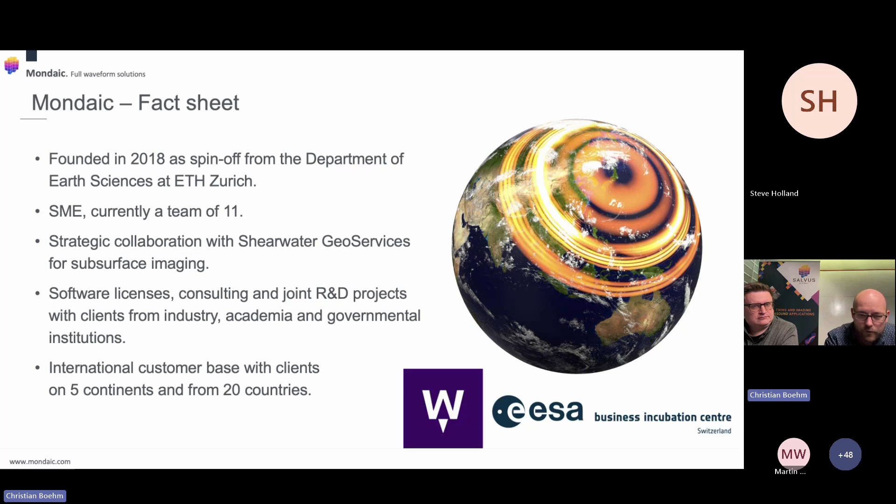Our clients range from industry, academia to governmental institutions. When you do software, it's actually fairly simple to go international. So although we're pretty small, we do have a fairly international user base. We're really proud to see our software being used all around the globe in millions of simulations. And there's also a very strong tie to R&D projects. So we do see quite a huge output of scientific publications of the use of our software.

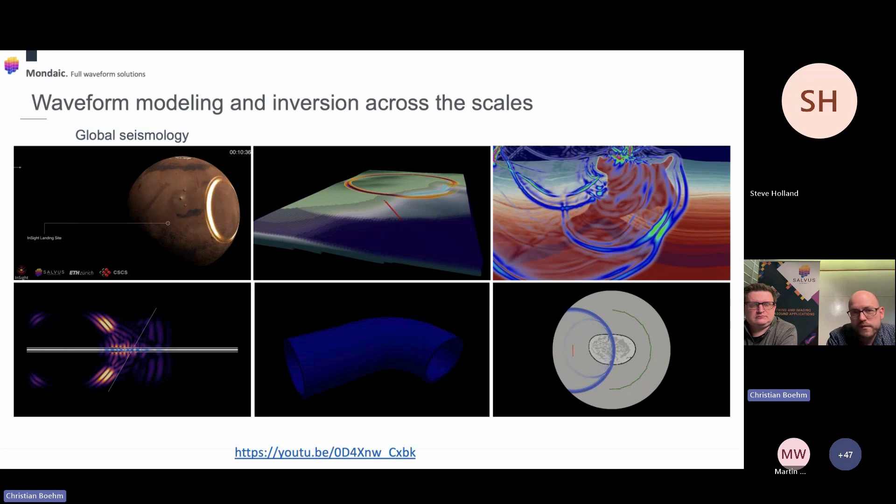So what is it that we do? Well, just a quick gap in scales. Where we originally come from is what you can see here on the top row. And those are waves that are very different from ultrasonic waves. Those are seismic waves. So we have been working together with NASA in the context of their InSight mission to simulate Mars quakes, to then infer information about the interior structure of Mars.

We have done quite a lot of work on simulating earthquakes and seismic hazard. We do have waves that still propagate over hundreds of kilometers. They can be measured on land or in subsea with distributed acoustic sensing. And for subsurface imaging, this is probably the pillar that promoted this method the most over the last couple of decades.

Many of the HOIS members, I think, are from the energy sector, and many of these companies have really driven the developments of waveform simulations and waveform inversions as a very powerful method to analyze the subsurface. This is primarily for resource exploration, but nowadays also shifted towards carbon sequestration, geothermal energy, and site characterization for wind farms. So here we see waves propagating over really long distances. And the question might be, what does it have to do with ultrasound and NDE?

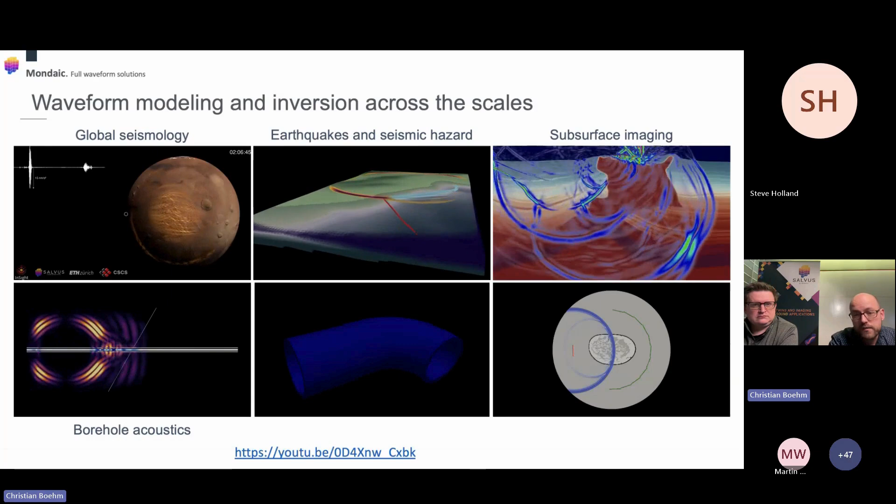Well, the same physical principles, they can be transferred to much smaller scales. And this is now what we see at the bottom. Borehole acoustics, where we are much higher in frequencies and much shorter distances, but we see the same physical phenomena occurring. We have waves interacting with the material properties and the geometries of the objects. We have NDT inspections on potentially curved surfaces, like for pipelines.

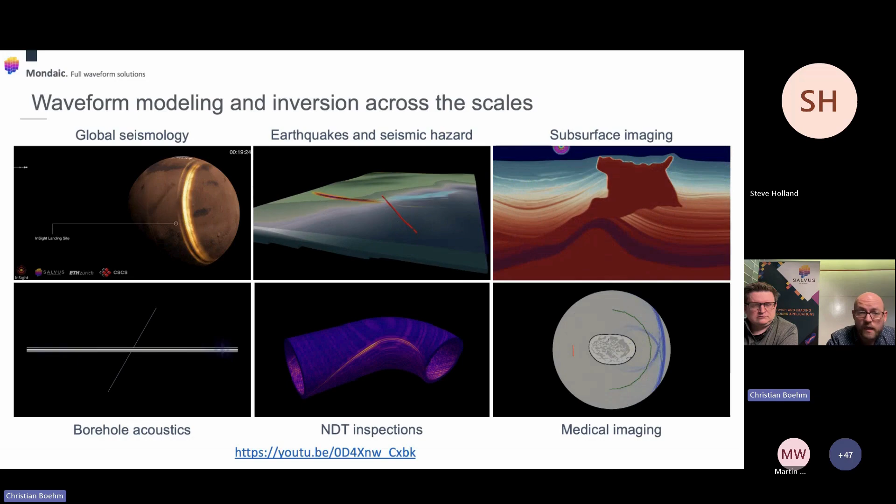And if we scale down the propagation distances even smaller, we end up with medical ultrasound, where we see that nowadays scanning devices for ultrasonic breast cancer imaging have reached the precision of MRI. So there's really a lot that we can infer from ultrasonic measurements. And the same physical principles literally apply from tens of thousands of kilometers if we study waves on Mars, all the way down to the millimeter scale that might be relevant for medical imaging.

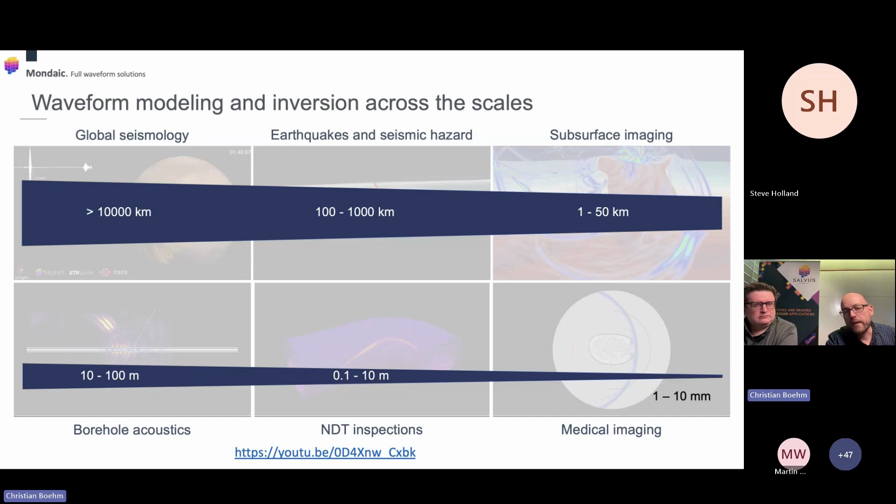So what we're trying to do is we're trying to promote this method for ultrasonic NDE applications. I want to give you a little bit of background about our technology, and then finish up with a couple of case studies, and hopefully engage in a discussion of how this could be useful for the projects that you're working on. So I guess I don't need to tell you, ultrasound is a great modality to non-destructively analyze specimens.

It's widely used. It's quite successful. You have conventional inspection techniques based on A-scans, B-scans, or C-scans. We've heard a lot about this already in the previous talk. And this works great in many applications.

However, we think that we don't really use the full potential of ultrasonic imaging yet. And this is when it comes to quite challenging testing environments, where the fact that all these scanning techniques only use partial data reaches its limit. It then leads to potentially low sensitivity and requires a lot of manual interpretation.

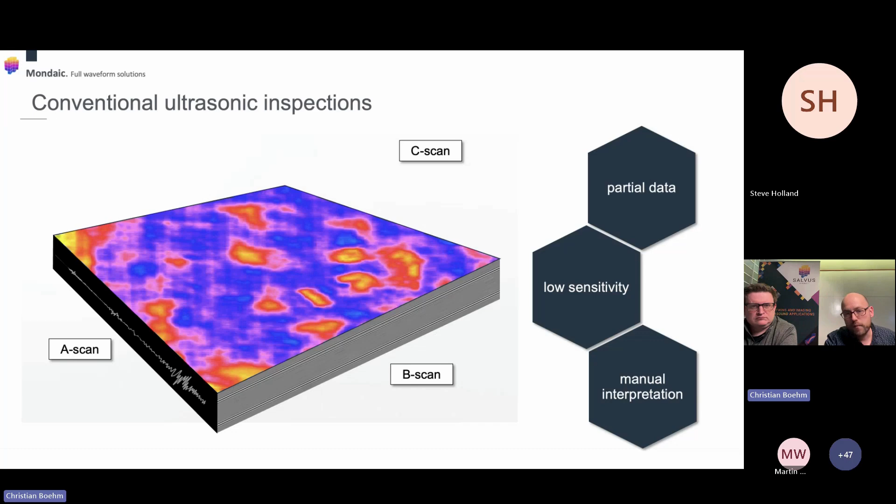And this is particularly the case when we have complex materials, for instance, exhibiting quite a strong anisotropy, or if we need to deal with quite complicated geometries, which are hard to represent in ray-based approximation of ultrasound. So what we're trying to do is transfer a technology that has been developed primarily in the geophysical sector of analyzing waves and inferring information about unknown objects from these waves. And this is what we call WSCAN, the waveform scan.

It's a quantitative imaging method that tries to infer three-dimensional models of the interior of an object through ultrasound tomography. And at its core, we do have a physics-informed digital twin, which really encapsulates all the waveform physics that are at play when we do an inspection.

So here we have a simple example of a CFRP plate. And as you can see from a single piezo element, the wave field that is emitted becomes quite complex very quickly. We have a strong anisotropy that we see. We have interaction with a delamination that leads to multiple reverberations. We have backscattered waves. We have guided waves. So there's a lot of complexity at play that's typically not captured if we approximate the ultrasonic wave just by a simple ray. By bringing in more accurate physics, we're then able to reconstruct high-resolution images, even though we're using low frequencies, and we can really turn ultrasonic inspection data into automated reports.

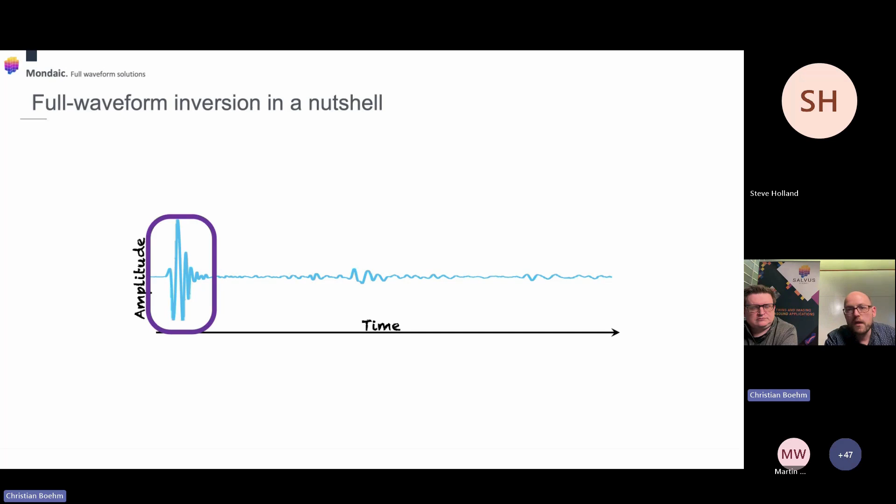How does this work? Well, in a nutshell, full waveform inversion tries to exploit a lot more data than conventional ultrasound. If we see a simple A-scan depicted here, you all know that a time of flight inversion method would essentially time gate the first arrival. We would get a travel time, and from that we could essentially do a simple approximation. The time of flight is equal to distance divided by sound speed. So if we wanted to infer the material properties, we could easily solve for sound speed in this case.

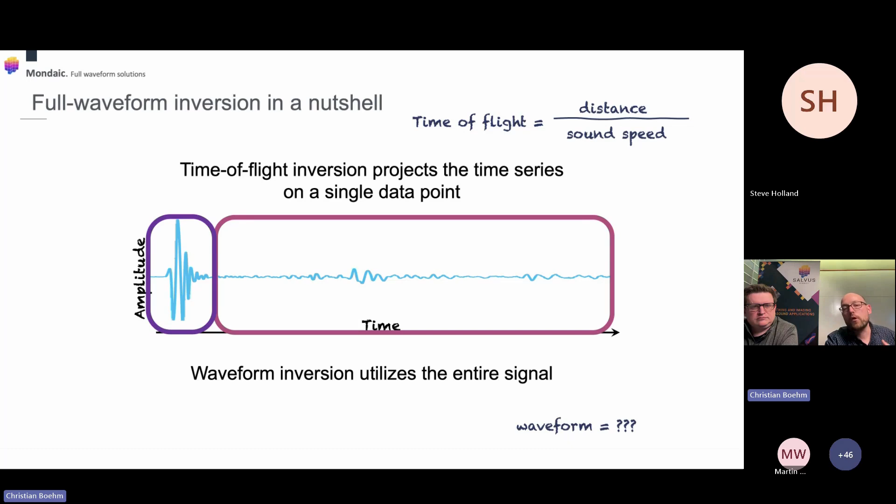But what you can also see from this little chart here is there's a lot of data that we'll just throw away by just looking at the time of flight. And this is what waveform inversion is trying to do. It really tries to utilize all the data available and invert and reconstruct a three-dimensional model of the interior using those data. The tricky part is, in this situation, we don't have this simple relation between time of flight or the measurement and the material properties. So we don't really know how we can relate those data to the interior structure. And this is why we have to solve a computationally more complex problem in order to get to this point.

But in a nutshell, what you can see on the right-hand side is why this method can be very powerful. We here have three different A-scans overlaid on each other. And as you can see, the direct arrival doesn't really show any difference. There are only tiny differences maybe in the amplitude. But for the later arrivals, you do see indeed quite some differences. And those are data taken from a block of concrete where we have a healthy structure, once a structure with an air void in it, and once a structure with some water inclusions in the duct.

And you can see that if we really analyze the long observations that we have here, differences appear, and we are trying to use that information to then reconstruct the interior structure with waveform inversion. So really trying to reverse engineer those signals, get a match to the actual data. By doing this iteratively, we then reconstruct a 3D model of the elastic properties.

A great part of this is that all the invention and innovation really only happens on the data processing side. So we don't require any different hardware, or we do not need to acquire data in a different way. We can work with off-the-shelf conventional probes, so we can use phased array, guided waves, acoustic emission, impact echo. That really doesn't matter that much. The only important point is we're really looking for applications where current ultrasound may not give you the quality or the results that you're expecting to get.

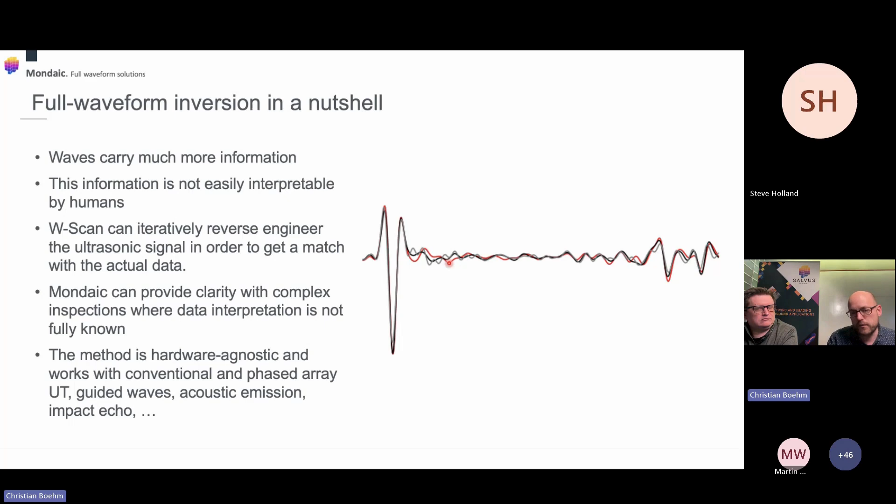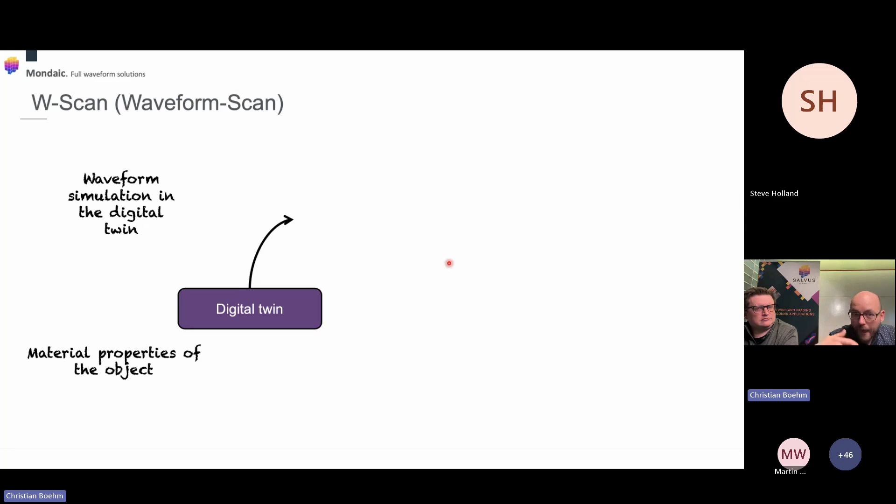To zoom in a little bit more, this is now a bit of a more technical slide of how the method works in principle. We always start from a digital twin. And digital twin obviously is a widely used buzzword. In our terminology, digital twin really means a model of the interior structure that we use to digitally represent ultrasonic wave propagation in this twin. So if we have this, we can start with a simulation. We can simulate the ultrasonic wave field as it would be emitted in an experiment, which gives us simulated data, which we can then compare to the measurements.

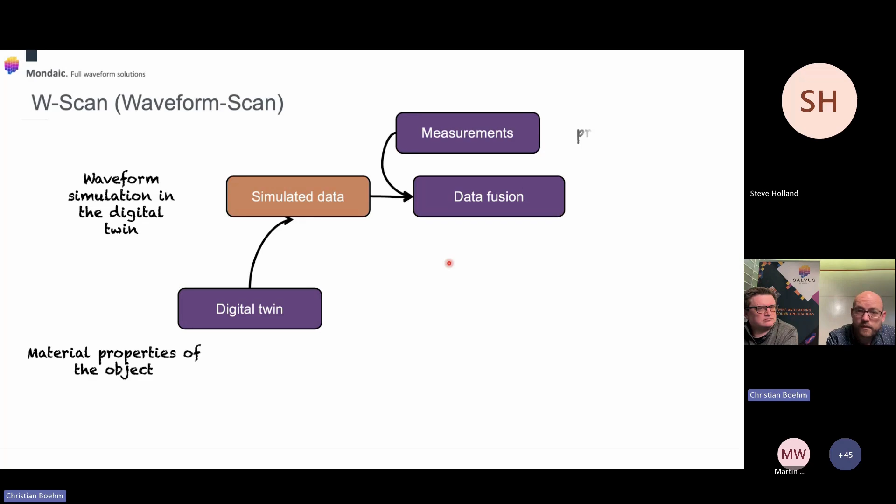And most of the time, we won't know the material properties of our object very well. This is the whole point of doing the inspection in the first place. So by comparing then simulated to measured data, we'll perform data fusion, and we will get a discrepancy between both.

And this discrepancy is where the method can then extract sensitivities that will tell us how I would need to modify my digital twin in order to have a better match between the measurement and the simulated data. And by doing so in an iterative scheme, I can then improve my digital twin.

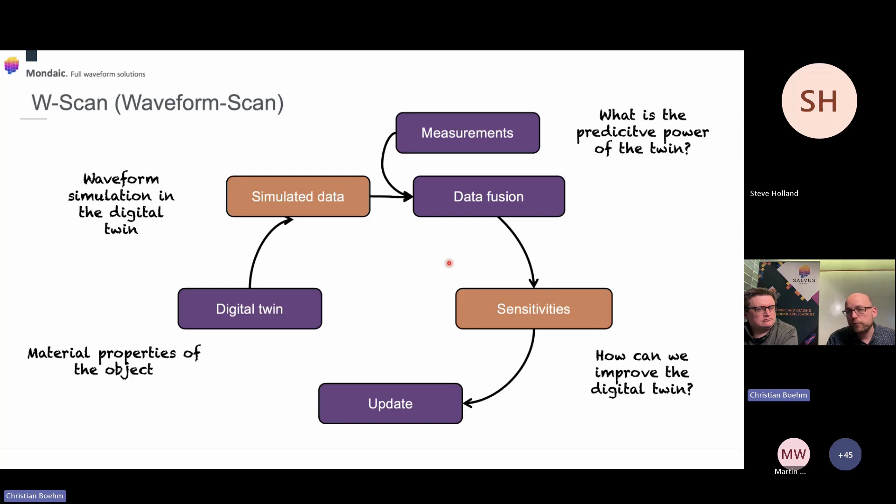I can keep iterating and refining my digital twin to eventually match the data that I have observed with my simulations. And by doing so, then creating an accurate representation of the interior properties of my specimen. So at the heart of it is really a digital twin, and we call it a physics-informed digital twin to distinguish it also a bit from a pure simulation tool.

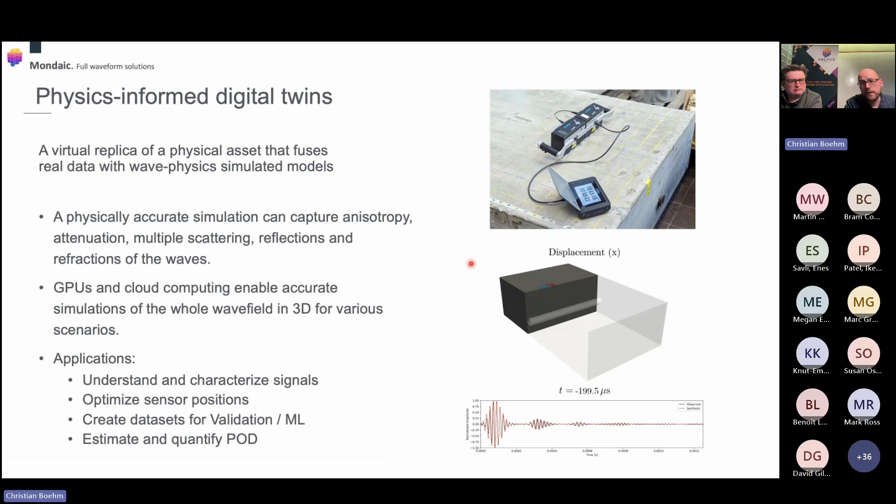So we really want to perform data fusion, comparing simulated data to the measurements that we can take out of the field. And these physically accurate simulations can capture all the complexities that we've seen in the previous animation that are at play when we perform ultrasonic measurements on a complicated structure. This can include anisotropy, attenuation, multiple scattering, reflections.

So it's a really complicated wave field, as the ones that you've seen in the animations previously, that occurs after a short amount of time. And if we can capture this in the simulation, we might also then use all the data available for the image reconstruction techniques.

Now you might say this all sounds great, but we tried this before, and this is extremely costly. And this is really where cloud computing, GPUs, and tailored methods to simulating waveform propagation come into play. What we develop is not a multi-physics tool that can simulate all kinds of different physics. We solely focus on the wave equation, but we can solve that very, very efficiently and orders of magnitude faster than conventional multi-physics tools. How is this helpful?

Well, you can see a small example on the right-hand side of a block of concrete, where you can see at the very bottom now an animation going where the black line is a measurement that we took on this block, and the red line is the simulation that we do after calibration. And we can really see that the observed data and the simulated data match literally wiggle by wiggle over a very long measurement time.

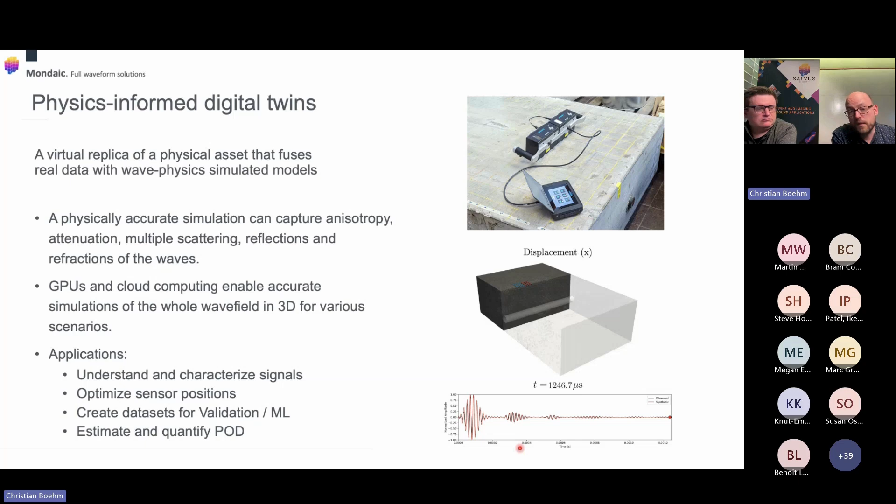If we can reproduce an ultrasonic measurement that accurately in a digital twin, it really helps us to understand and characterize the signals. We can use that to optimize sensor positions. We can also create lots of synthetic scenarios that can help with validation of machine learning algorithms without the need of manufacturing a lot of specimens manually and doing measurements on these specimens. And then finally, we can also use it to estimate and quantify the probability of detection for any given application.

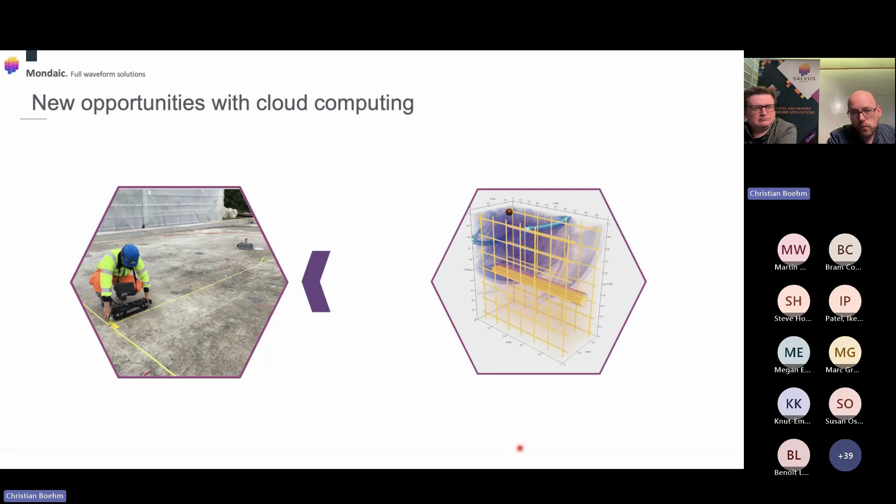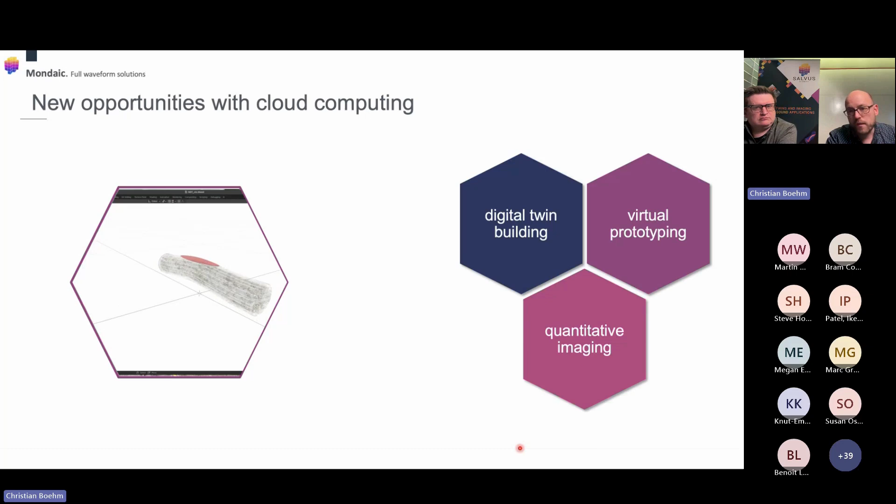So in a nutshell, what we do is we utilize cloud computing by sending data to the cloud and process it in the cloud in order to get reasonable time to solutions. And then we send back the data and the results to whoever is taking the measurements and allow them to analyze the results on site or later on in post-processing. This enables digital twin building, virtual prototyping, quantitative imaging, and monitoring. So really a lot of applications that we're seeing coming up on the horizon where this can be useful.

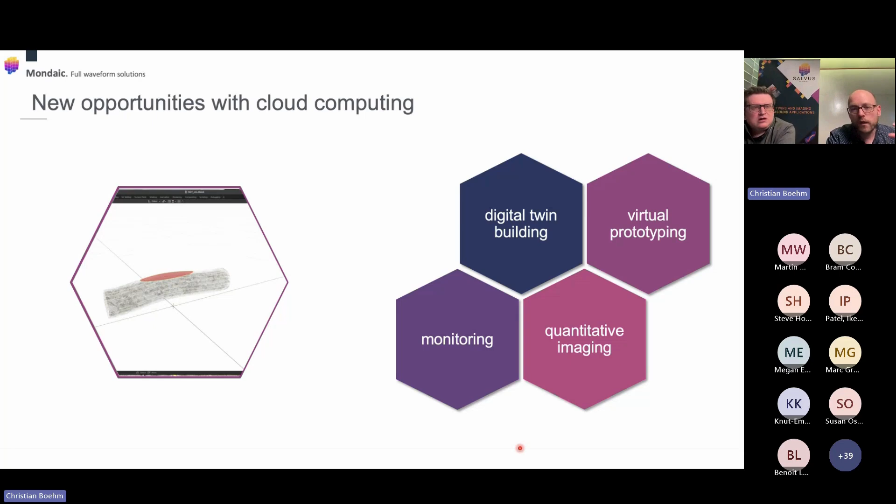And again, ultrasound is widely used and is very powerful. If you have an application where ultrasound is already working well, we won't be able to do any better. So we're really focusing on inspection challenges where currently ultrasound struggles to give good results. So for instance, if the received signal is not well understood because we have a complex interaction with the material's interior structure, or the interpretation is very difficult, leading to many false calls. So here additional physics might help to better understand what I'm seeing in my images.

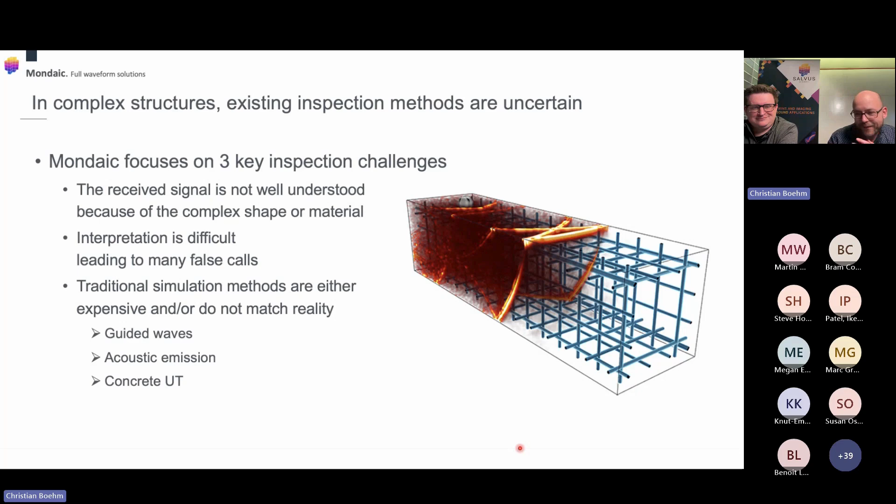Or when traditional simulation methods are either very expensive to carry out, or they just don't match reality because they simplify the physics that are at play. Three examples that Chris will go into more detail on in some case studies are, for instance, guided waves, acoustic emission, or ultrasonic inspections of concrete. So I really see a lot of potential in this method, and to convince you that this is not just a pipe dream, but something that also works on real data, I'll hand over to Chris to walk you through some case studies.

Thanks, Christian. Yes, the first case study I'll go through is a guided wave in a composite panel with stringers. This is really to show you the process, and it's applicable to other types of materials, other types of ultrasound as well. The process is fairly similar between all of them. Composite panels were important as well, especially things like fiber waviness or delaminations out of plane, and that's why we've come quite far on this project, and this is a good one to show as well.

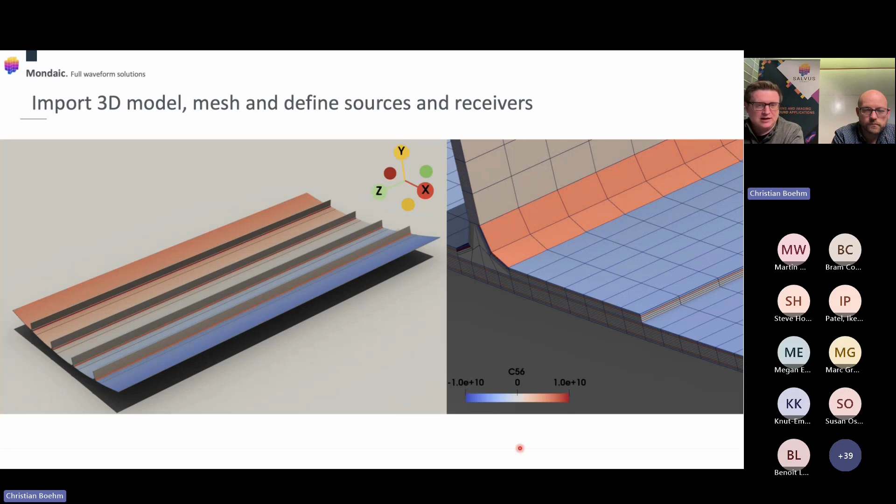The next question I'm usually asked is, well, Chris, I've got a CAD model, but actually that doesn't represent what's actually in real life, and that's quite correct. There are tolerances, especially with service inspections as well, where you've just got a simple drawing and the asset's over 50 years old. Yes, that will be difficult to get a match first time, but that's where our procedures help. We have shape optimizations throughout the inversions.

But it's good to have a close CAD to start off with, and you'll see the examples of what we do here as well. But yes, you don't need a fully accurate CAD to start off with, and then our software will correct the CAD, so then you have a better CAD model for the future as well, using the ultrasound that you're getting.

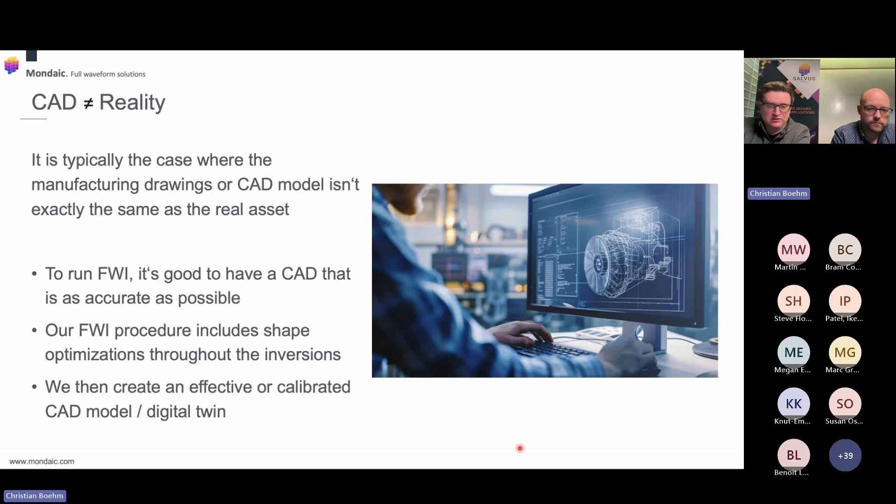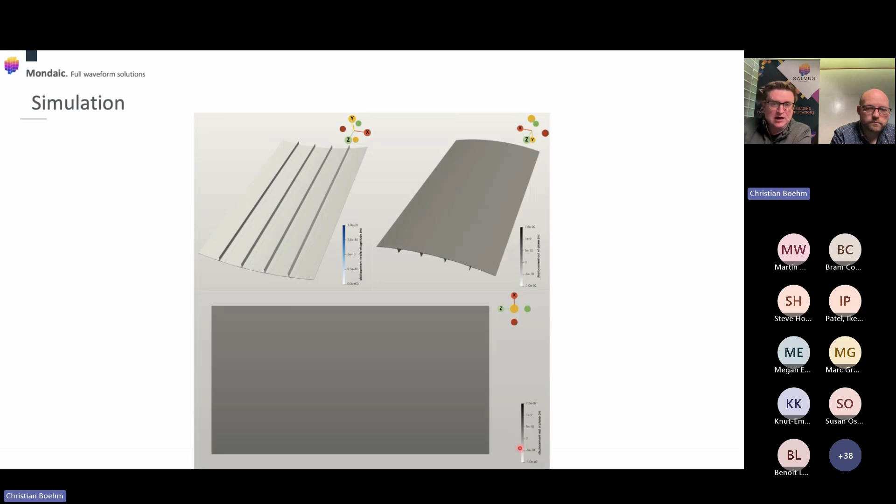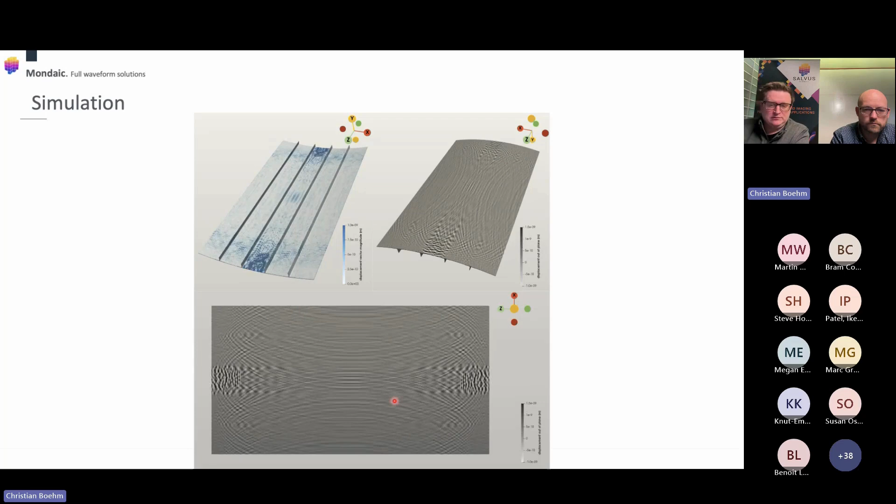So then we run a simulation, much like we know the equipment. What we're modeling here is a guided wave from a single piezo element propagating in this panel there. So you can see the anisotropy because it's not a full sphere, and you can also see some waves traveling down the stringer as well. Very light, but it's all there. So that's how the ultrasound travels through the panel in a simulated case. We'd then like to calibrate that.

So what we have here is the simulated data on the left, and then we have access to a laser Doppler vibrometer to image the vibrations from that as well. This is actually the data from the LDV scan there. Again, you don't need exactly this equipment. This really shows the vibrations across the whole panel, so it's quite nice to show you what we can do.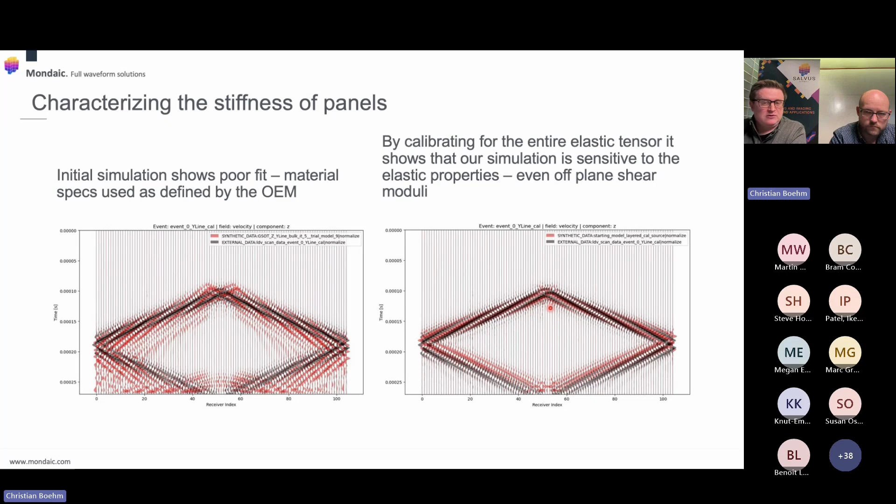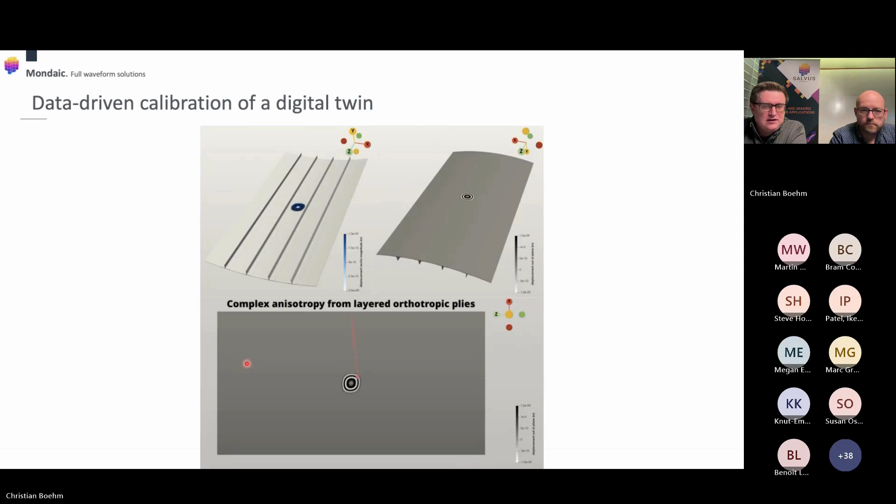But by calibrating now the entire elastic tensor, we can optimize the fit, and you can see now, at least at the first phase, we've got a very good match, even for out-of-plane shear moduli as well. So it shows that our simulation is sensitive to the elastic properties. So now we put that back in the model, and you then see, again, the optimized simulation based on the real data.

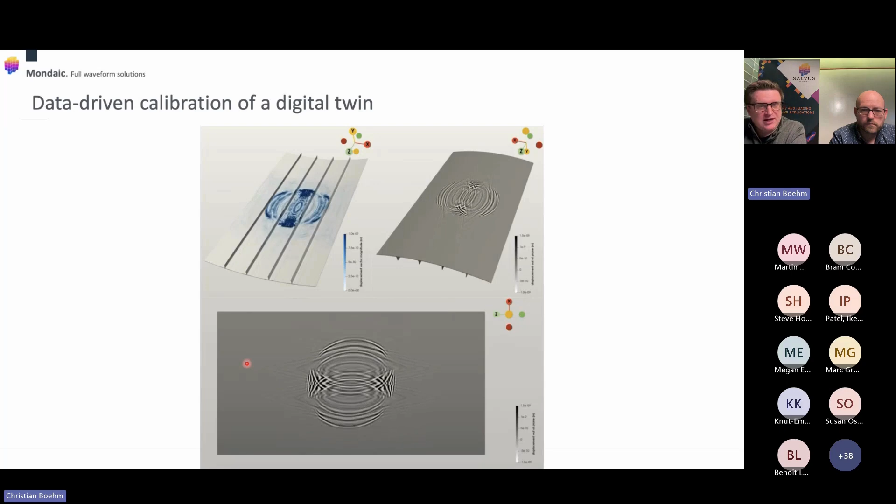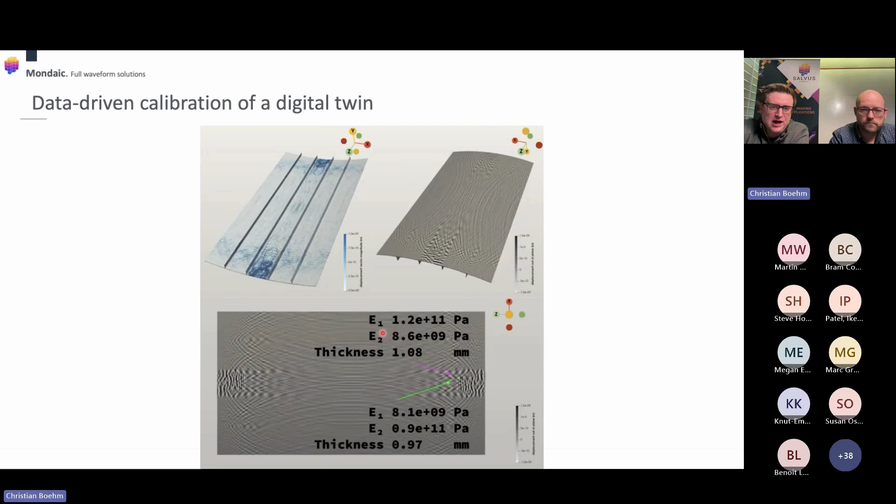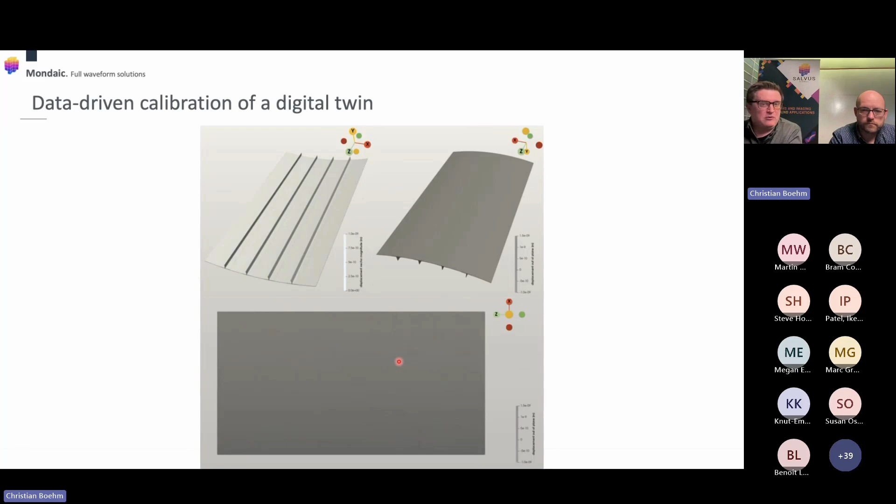We've got some Teflon samples in this piece as well, and this is before we put it in, but it also shows defects very clearly. But what you can do is, because you've got that whole panel there, you can actually take any point on that and extract the Young's moduli and the thickness and other material properties as well. So it's not just a C-scan you're getting, it's full material properties that you can extract from that single piezo transducer.

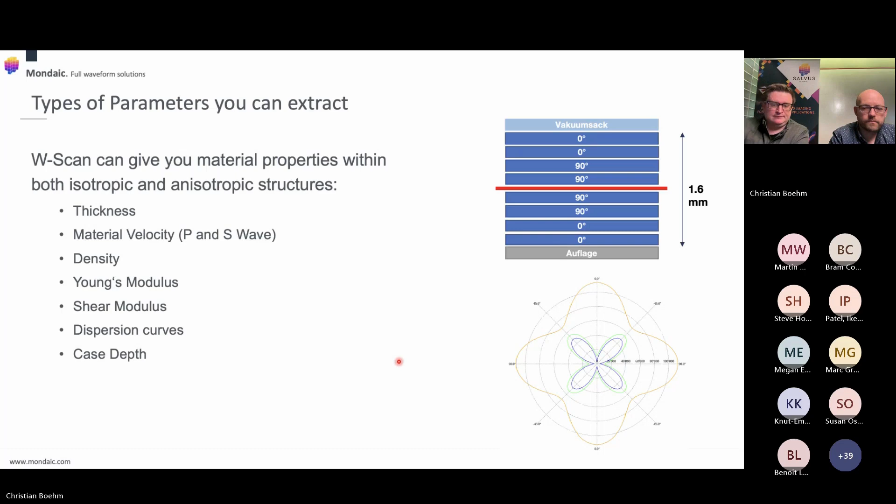So these are the types of parameters you can extract. Things like thickness, which is normal. You also can get out the material velocity, the P and the S wave, the density of the material, Young's modulus and shear modulus. If you're using guided waves, you can also calculate the dispersion curves, and even material properties like the case depth, because that would be a different velocity.

So that was more of a production-based application. We also have in-service inspection experience to show the practicality on aging assets. This particular example is for concrete inspection, but again, it's applicable to other ones. This is where we didn't really know the asset we're inspecting in full. You can see here, it's a retaining wall with ribs.

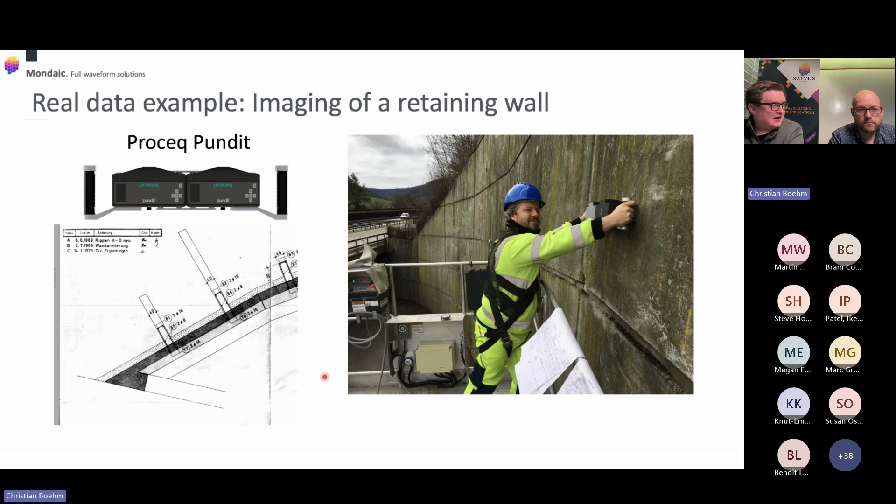What the client wanted to do was make a scan to find out where they could put additional anchor points in there. We didn't have a CAD model. We had this drawing, and I don't know how old it was, but that's all we had. We took that as the initial model and then began a simulation in this digital twin. This is using the Proceq Pundit low frequency ultrasound tomography machine.

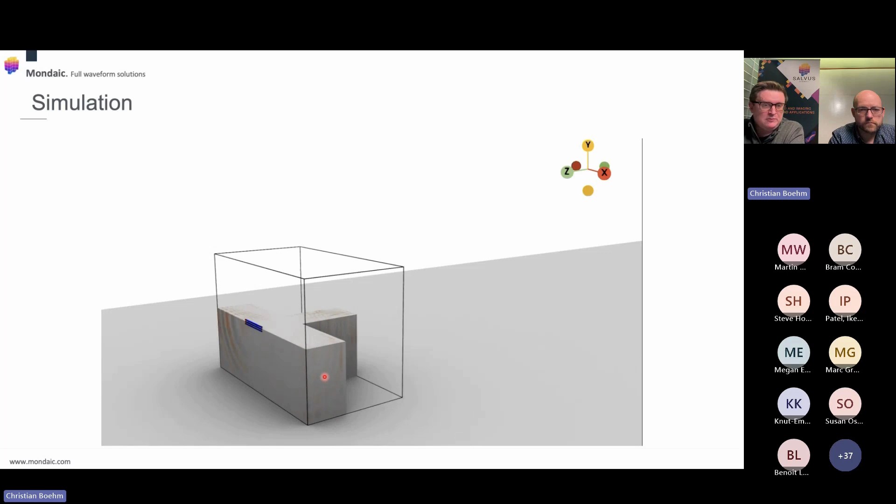You can see this is how the ultrasound flows into this retaining wall and then the back ribs there as well. What we wanted to avoid is of course drilling where there's rebar underneath, so any kind of density anomalies is important to find. So using this iterative data fit, it's not just one full wave inversion we run, it can be many, because the more iterations you run, the closer to reality you get.

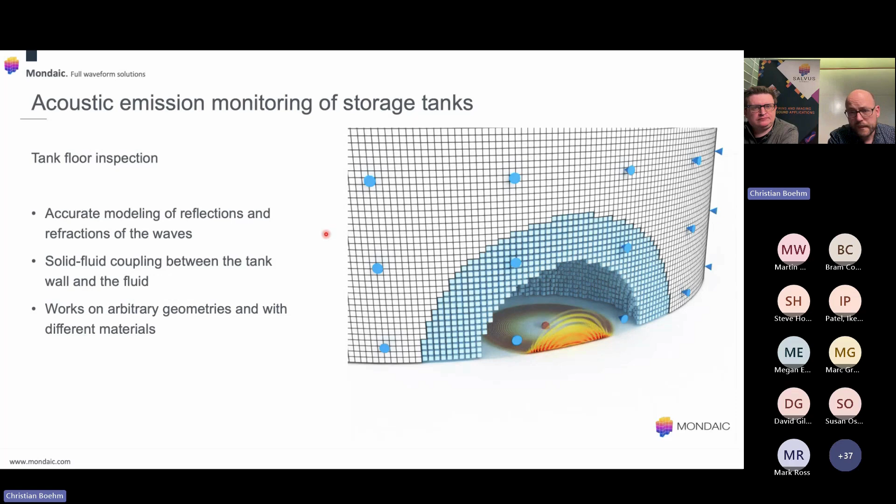And we have a geometry which can be more complex. In the simulation we only see a cylinder, but as you all know, the interior of such a tank can be quite complex, and the waves will interact with those geometries as well. Acoustic emission in itself is also a modality that is quite widely used for monitoring of concrete structures.

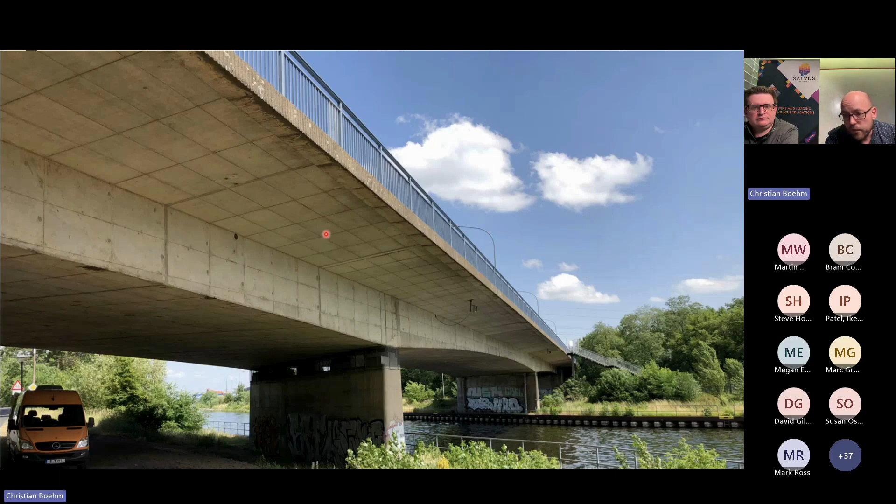This is a project we're currently running on a bridge in Germany, where the idea is that acoustic emission can monitor tension wire breaks. If too many of these steel cables break, the bridge will eventually collapse. We want to prevent that. How can a simulation help in this case? Well, again, the digital twin can help with planning of such a monitoring system.

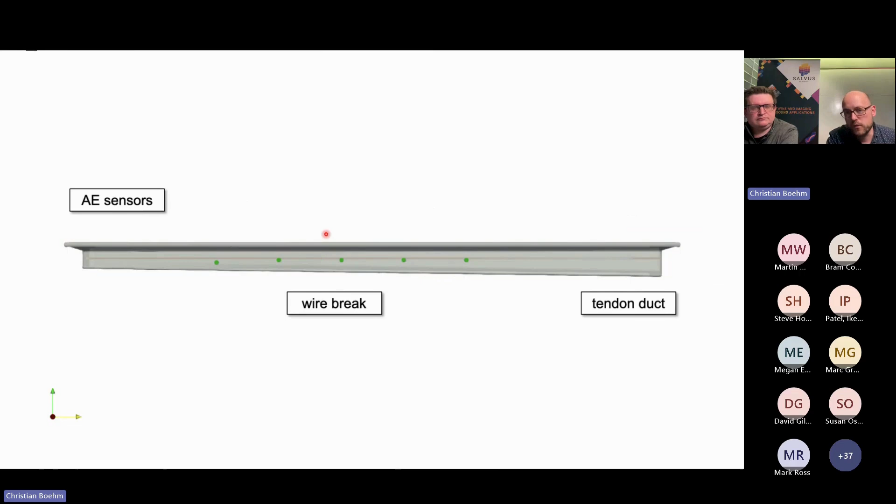We see an animation here where the key question was: how should we place the acoustic emission sensors? How many of them would we need? And we can then hypothesize a potential event of a tension wire break and see how this would be observed in a virtual acoustic emission sensor that we can put into the simulation.

We can also answer questions like, where do the waves actually propagate? Do they propagate along the metallic or steel tendon duct? Do they propagate mostly through concrete? You can see in those signals here that there is a very early indication from a head wave that really travels through the steel and is then captured by the sensor. And then only later on, we see the majority of the signal that was propagating through concrete.

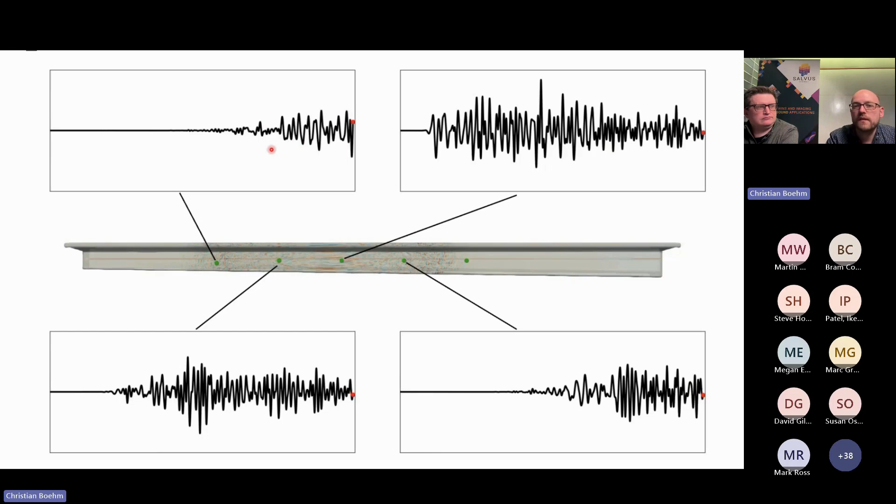When we turn to, again, a bit more complex geometries, this is, of course, an exaggerated example here. But if we look at pipelines and potential pipeline inspections, guided waves play a key role. Simulating them accurately can give us an idea of how the measurements would be sensitive to potential damages or thickness variations that we have.

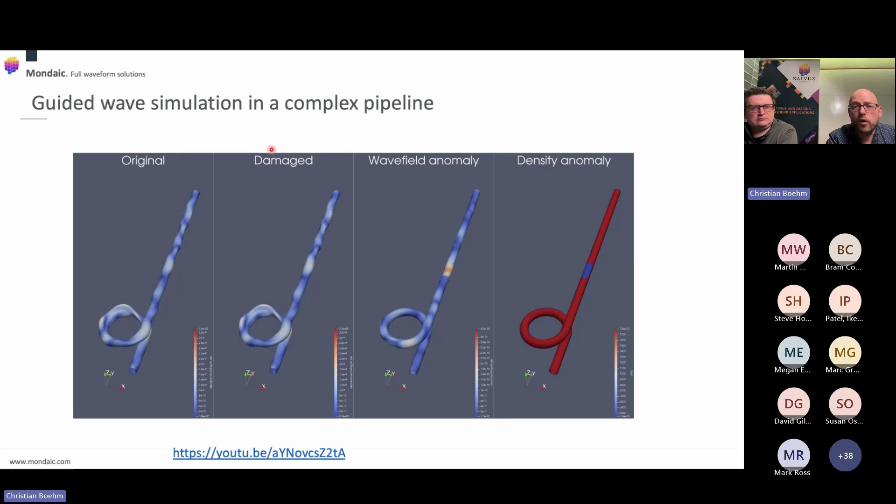So here, for instance, we do have a thickness variation, which shows up as a density anomaly in our measurement. And what we can then see in the third panel is essentially the difference between two hypothetical measurements on a healthy pipe and on the damaged pipe with the anomaly in the wall thickness that we observe. So this is something we looked into a little bit closer.

How can this be used for thickness measurements using guided waves? So here we see a snapshot of the wave field, and in red colors, we have indicated the wave field anomaly that comes from the interaction with a thickness variation that we might observe on the surface. So we do have a very small variation of thickness in the casing of the pipe, and we can see that there is indeed an imprint in the guided wave field that we simulate.

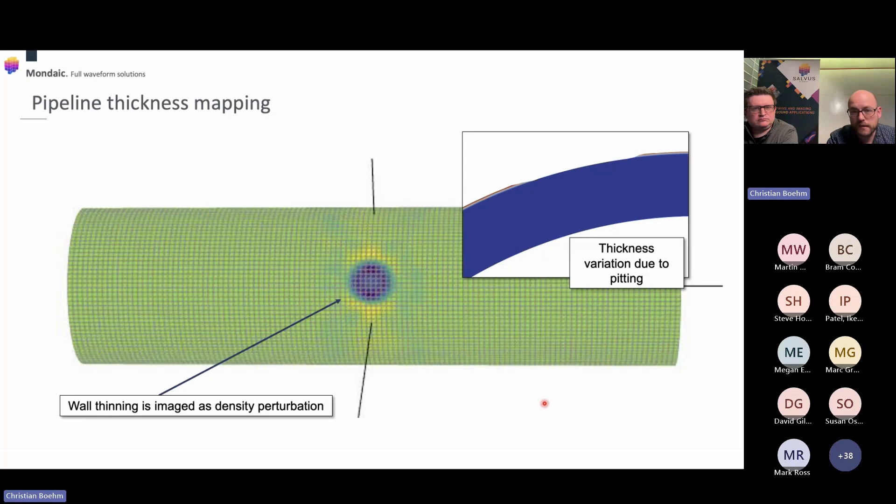And again, then by doing data fusion, by comparing measured data to simulated data, we hopefully can reconstruct the location of such a thickness variation in a pipe. Now, finally, just a few more applications that we've looked into, where we do think that understanding better the waveform physics of ultrasonic wave fields might give an advantage, and could be interesting to exploit both for simulations, but also for imaging applications.

So there's a key interest in understanding or finding disbonds between the outer structure of the blade and the spar caps, and in general also composite sandwich structures where conventional ultrasound struggles because you can't really get in with the high frequencies that you would need for high resolution. However, when we use guided waves, when we model more of the waveform physics, we can use much lower frequencies, and by doing so, we can also penetrate deeper structures better and get a better signal-to-noise ratio while not compromising the resolution we might obtain.

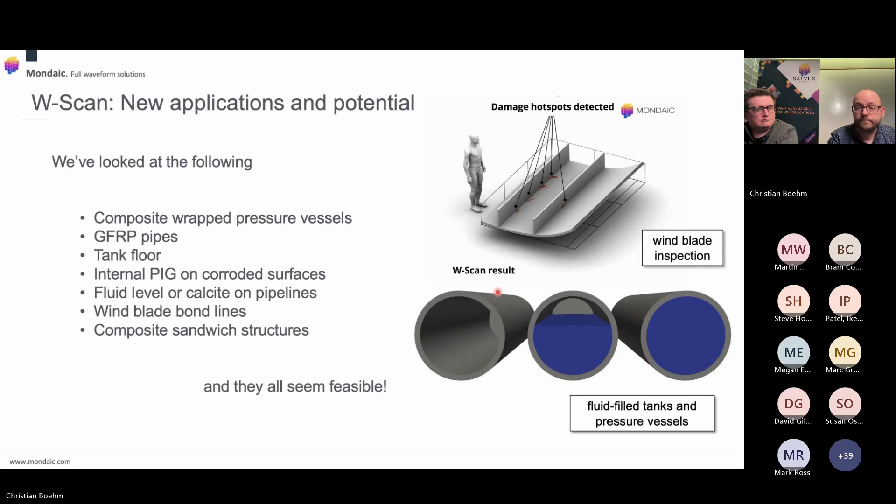So, coming to an end, we'd really like to open up for questions and get your thoughts and input. So we develop software that has been used quite successfully in geophysical applications. We have done work on concrete inspections and composite materials as well. We don't think that that's the end yet, though. So we are really eager to learn about potential additional applications and problems that you might be struggling with when performing ultrasonic measurements and trying to understand the signals. This would be more the digital twin part of it, or if you really want to improve on the inspections or the reconstruction of the 3D models that you might get from the interior.

And a particular focus here would be in really getting a quantitative model of the material properties. So not just a grayscale image that indicates interfaces, but really getting a 3D map of what's my Young's modulus, what's my shear modulus inside of the structure.